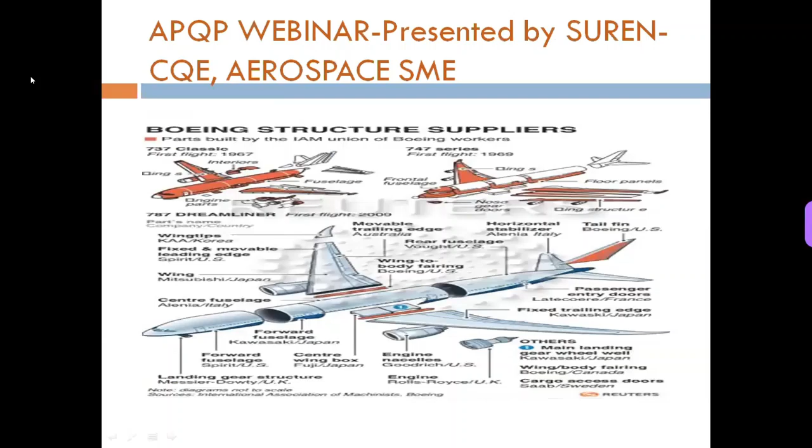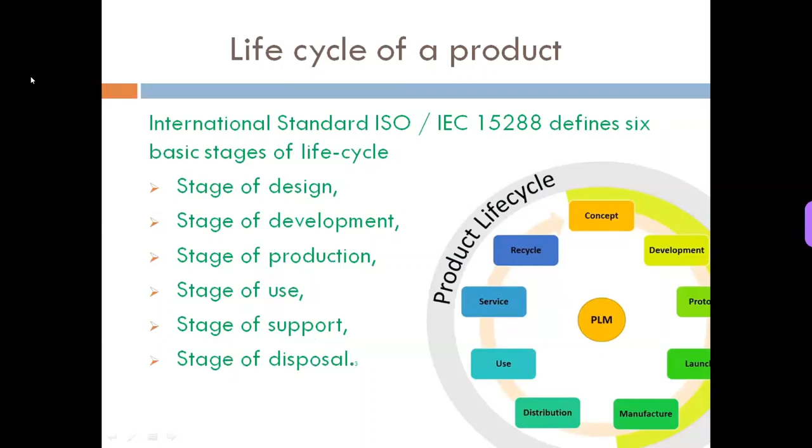So the product life cycle is in 6 phases, from concept development to the product decommissioning.

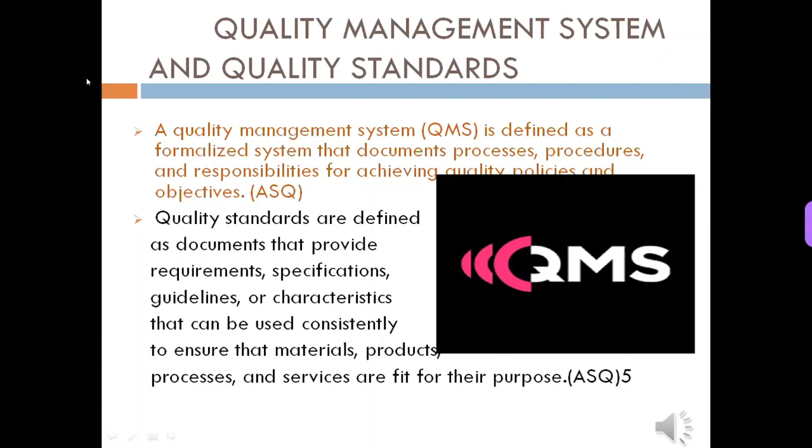So the quality management system that we adopt for aerospace is QMS AS 9100, and the quality standard for APQP is AS 9145. So we'll quickly understand this AS 9145.

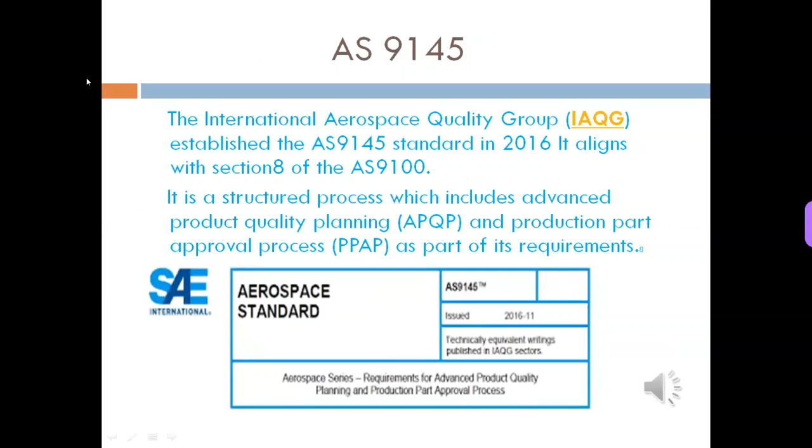It is for the new product development, created by IAQG. And there are similar standards, are you able to see, sir, the AS 9102 and 9103, etc.? Yeah, we can see, please go ahead. So these are some of the other standards that are working in tandem, working in collaboration with the AS 9145.

And we'll take a synopsis of what we have discussed now. The QMS exists in all sectors, and we have just discussed the product life cycle. The quality standards cover certain areas depending on where your company's activity is. The standard AS 9145 focuses on the NPD of aerospace parts. Standard AS 9145 is included in section 8 of the QMS. The QMS is the larger canvas, and if you look at section 8 of the QMS, you can see the AS 9145 there.

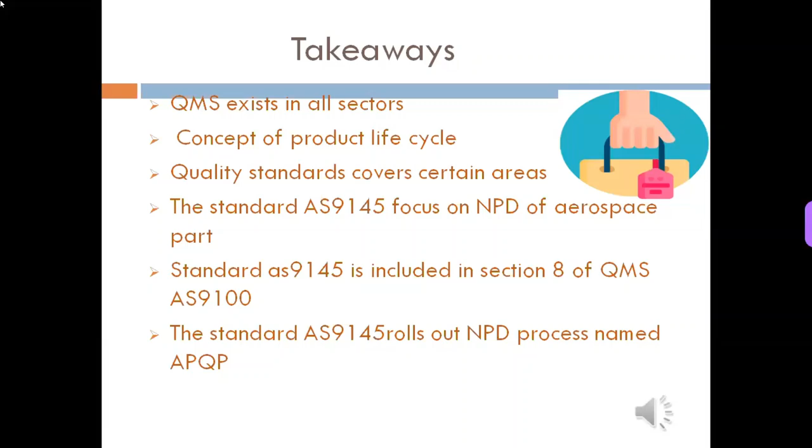Standard AS 9145 rolls out the NPD process named APQP. Now let's go to APQP, what it means, and what is PPAP. APQP and PPAP are two core tools that cover most of the product life cycle of an aerospace or automobile part. This is the reason why elaborate training is given to the personnel involved in new product development. APQP outlines the complete process to the supplier to make sure that the supplier is capable of designing a product and manufacturing it to meet the customer requirements.

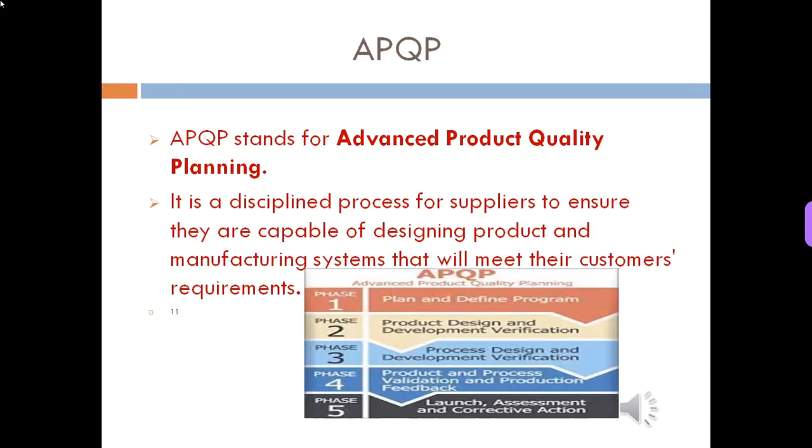PPAP is documentary evidence that demonstrates that the supplier has the potential to produce parts that consistently meet all requirements at the customer demand rate. What's the customer demand rate?

A product has to be supplied at a certain quantity at a certain time. So it's not enough that you produce a part, but the customer would need the part to be supplied at the customer demand rate.

In fact, it is called a blisk. A blisk is a bladed disc. It's an innovation in the design of a compressor. Previously, all the blades were assembled around a disc, and now it is made in a single monolithic design, and it's working very well in the modern aircrafts.

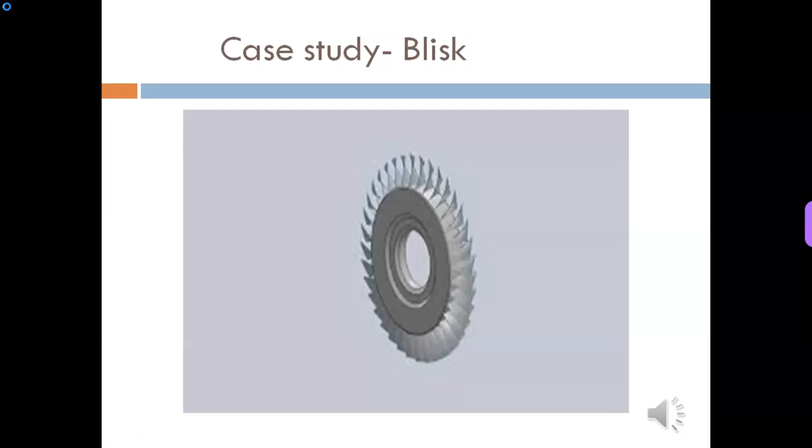So this case study I have just shown you, we will be virtually processing this part throughout this session. So it'll help to understand the process better.

So we are in the 5 phases of the APQP. Is it visible, the 5 phases, sir? Yeah, visible, sir, please go ahead. Yeah, just to make sure.

So APQP is in 5 phases: the planning phase, product design and development, process design and development, product and process validation, and ongoing production.

In the planning phase, one needs to identify all the project scope, and it's just that not enough to make the plan vaguely, but we need to figure out a robust planning. We need to understand each and every element and make sure that this has a written criteria which will be revisited after finishing the project.

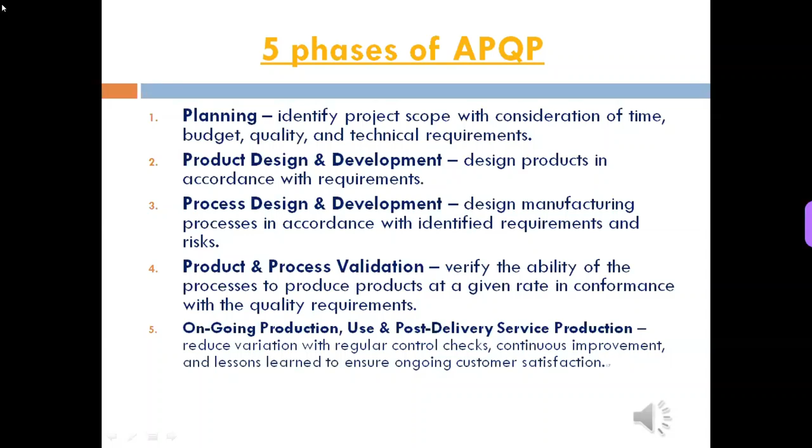In detail, what are the activities? We will be discussing each phase in each slide so that you can understand it later. Right now, we will give only an outline.

I would advise those who are learning this, please try to put it in a paper, save it, and see how time can be saved, how you can concurrently engineer 2 phases together.

So we have discussed the larger canvas, that is APQP, and we also know that PPAP is documentary evidence. So what are those elements of PPAP? What are the PPAP elements?

PPAP will be discussed separately because it's a little bit in-depth and complicated. So we'll just outline them now and we'll move ahead and come back to this at the appropriate time.

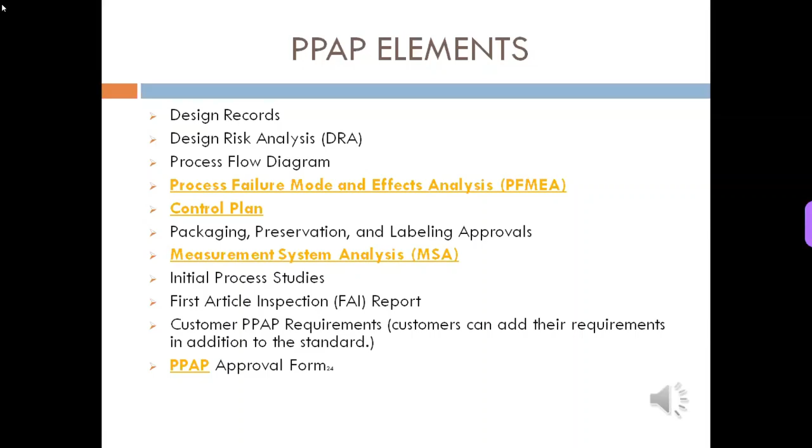It doesn't mean that it should not be recorded. It will be recorded for your own reference, but the customer will ask for the PPAP document from phase 2 onwards. And you can see that in phase 5, before phase 5, the PPAP approval form is completed. What does that mean? It means the customer is not going to allow you to do any ongoing production before PPAP is approved.

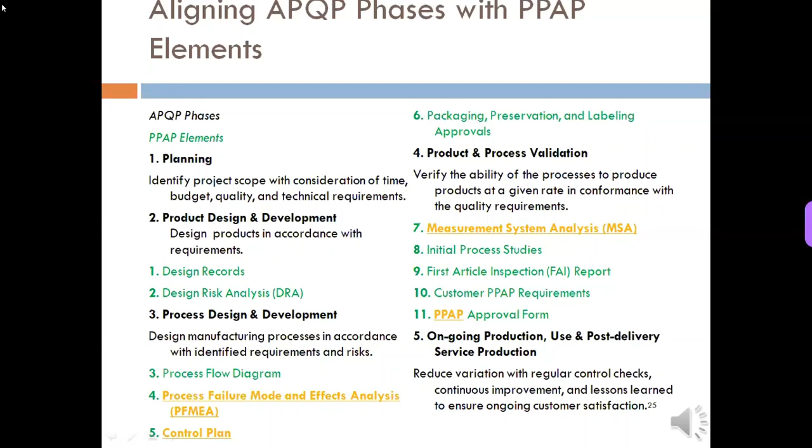So it is not always that the PPAP is approved. PPAP may be partially approved or even rejected. In such a case, you need to go back and make sure that all the anomalies are completed to the customer satisfaction.

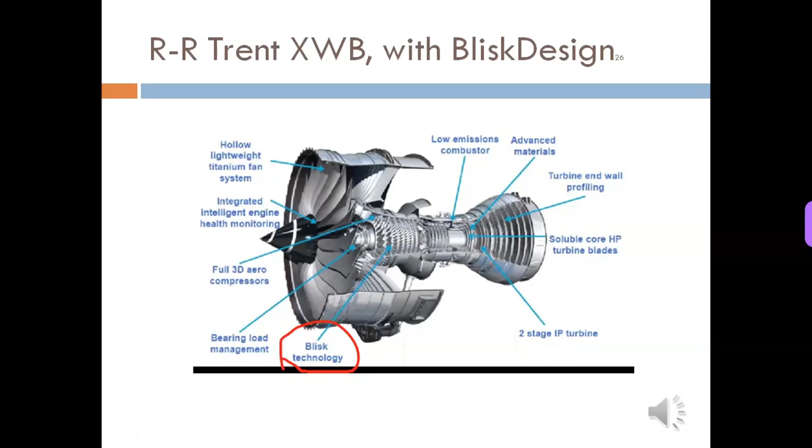So we have seen this case study part and we know where it is sitting. Let's take it out from the engine and have a closer look.

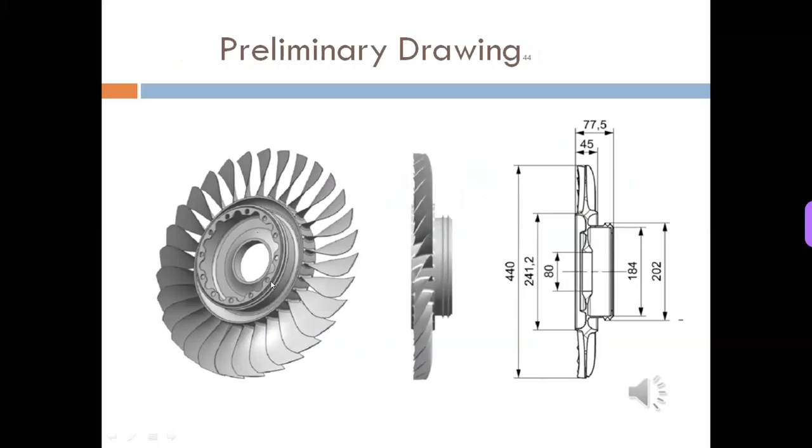These are bolt holes. What is this for? To fit one blisk to another one. And what is going inside this bolt? Some mid shaft and seals here. You have a very preliminary drawing which is required for the processing in the planning stage.

So we are going to phase one, the planning phase. For any phase, any cross-functional team needs some inputs. What are those inputs? You need the product and process benchmarks. You need product and process assumptions. You need reliability studies, the quantified number of the reliability.

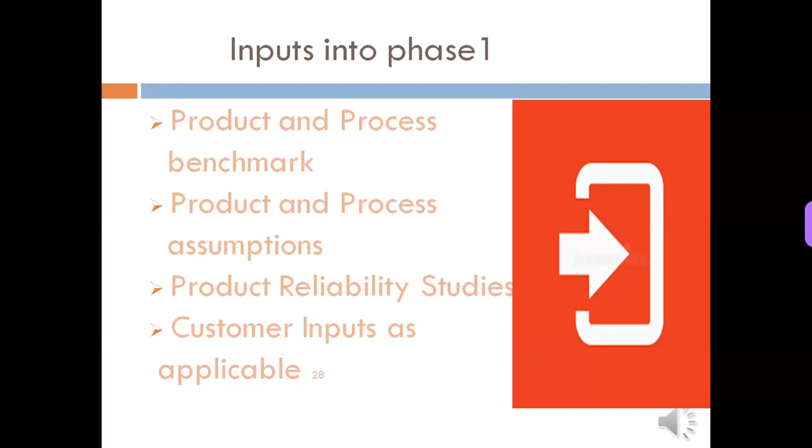And of course, it goes without saying that the reliability of the product has to be better when the next level, next product is initiated. And also, the customer will have some inputs to share, because the customer is in the business for some time and would have learned lessons and will have some input to share. So with all this data in hand, we are moving to phase one, that is planning.

What are the activities in the planning? Basically, collect all the technical and non-technical requirements. Technical requirements are requirements like dimensional limits, specifications, GD&T standards, surface treatments, material specifications, NDT requirements, and any special requirements from the customer. Customer can give any special requirements like surface finish, etc., or uniformity in corner breaks. Customer can add up some requirements.

The non-technical requirements are basically commercial, like who would be responsible for transporting the part to the customer sites? What are the demand rates? And the penalties if a sufficient number of parts are not delivered in time, and the timelines, etc.

Developing a statement of work is required. That's a communication tool that will go a long way in understanding the project very well by both the stakeholders. A product breakdown structure, which is a high-level bill of material, is also required to be understood by the planning stage.

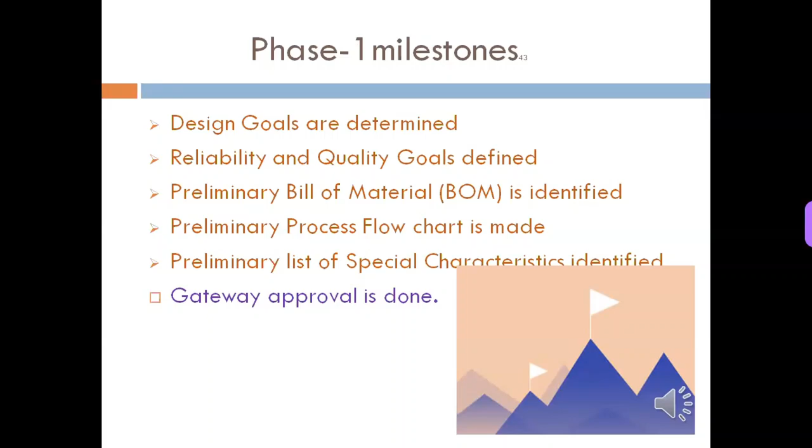And once these criteria are understood, it's called a gateway approval. It's a gating process. It is gated to the next phase. Means this is frozen. Some people call it freezed, and some call it frozen. It's just language, but it is frozen for the time unless some revision comes. So phase 1 is completed. This takes us to phase 2 of the APQP. What are the activities in phase 2? We start with making a drawing. This is called the design record.

And you should not leave any details in making a drawing. Detail in the sense, dimensional specifications and whatever is pertaining to the product should be a complete definition. And now you need to do a risk analysis.

You have a product in your hand and you need to know how the product is going to perform, but the product is not yet made. But how do you make the analysis? There is a tool called DFMEA, Design Risk Analysis: Design Failure Mode and Effect Analysis. Using this analysis tool, you can identify each and every possible failure mode, and then what do you do? You see there are so many failure modes. How do you mitigate it when the product is not even made?

So this is done by the DFMEA team, and they know how to. So we are going to learn this in a workshop session, a DFMEA, how you get the risk priority numbers, and how you're going to reduce them by mitigating the risk in the product. This will be learning. And the next phase is design for manufacture and assembly.

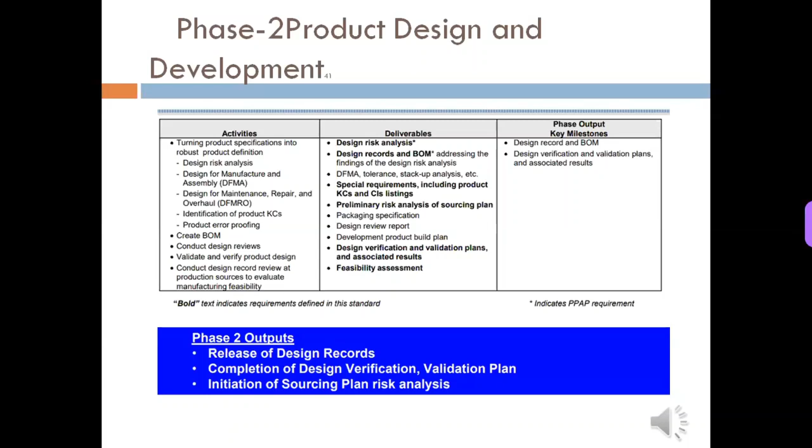I am showing you this slide again, just revisiting, and you can see phase 1 and phase 2 are overlapped, and phase 3, which we are going to look into now, is going to start simultaneously with the product design. So, probably a Gantt chart in a different way will make it very clear what concurrent engineering is possible. It's not extended to the planning stage, start right there.

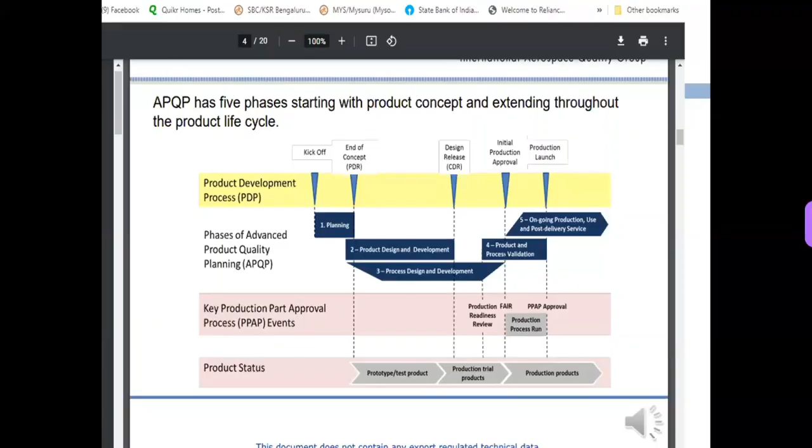It means that phase 3 activities can be, for example, cutting the raw material. Once the preliminary size is given, you can probably start processing, cutting the raw material. For example, I'm saying it doesn't apply everywhere. Please don't take it for granted. But depending on the product, concurrent engineering can be done. So we are moving on to phase 3. What are the activities in phase 3?

Even though we have gated phase 2, we have to identify some areas where phase 3 can be done, and where it doesn't apply, it should not be done. What are the main activities? Activities start with identifying the process and key characteristics. You need to identify, once you start cutting the metal, oh, did I say metal? Are you all in agreement with what I said? Because so many of the components are of composite material now. So I have to change to material.

When you start cutting the material, you will do it in stages, probably a roughing stage, roughing 1, roughing 2, roughing 3, finishing 1, finishing 2, and drilling and deburring, inspection, and special processes like NDT or shot peening, and then the coating, painting, etc.

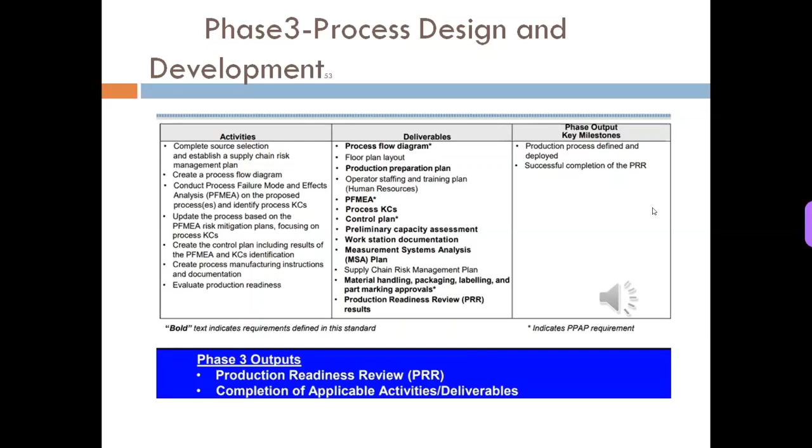There are a few factors: bias, linearity, stability, repeatability, and reproducibility. These are the villains that stand in the way of the inspector who is in pursuit of the truth. The truth is the true value. So we need to go in depth. So why is this required? The customer will need the supplier to conduct the MSA study, without which he's not going to accept the part. So you have to make sure that your measuring system is capable. Covering this in depth will be done in a workshop session. And not only MSA; we will be covering PFMEA, MSA, control plan, all this in a different session.

And what are the milestones? The packaging standards. Packaging is very important because once the part is made so accurately, especially if it's an aluminum part, it's likely to get distorted in transportation. So packaging standards and specifications, process definitions, PRR, which we'll again discuss in detail. A process flow chart is made because now you have identified all the processes, which is a diagrammatic sketch of the process flow. Floor plan is how the machines are laid out. Characteristic matrix is a communication tool. PFMEA, pre-launch control plan, MSA, and preliminary process capability.

What is process capability? For example, you have the size 100.001 mm. 100 was the size required. It's now 100 plus 1 micron. This is the first part. The first 10 parts, average is 100 plus 1 micron. After 2 weeks, take another 10 parts and measure them. Average size has come to 99.997. So what happens? Tolerance is plus or minus 5 micron. You need to give some tolerance. So it's still within tolerance.

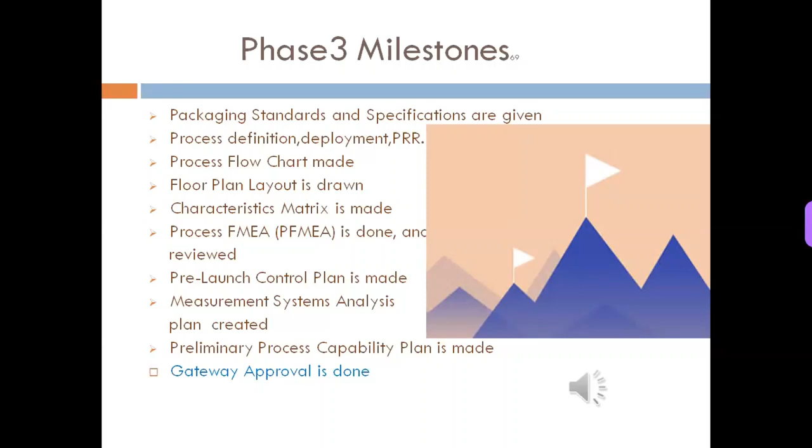This is very important because if the process keeps shifting, like plus 4 microns to minus 4 microns, it covers most of the tolerance field, right? So even though the tolerance is plus or minus 5 microns, the customer does not want you to make plus 4 microns and the next 10 parts minus 4 microns. This is not acceptable. So there is a limit, there is a number, and that number will be calculated and has to be studied. So this is the process capability.

So once all these milestones are achieved from phase 3, we are moving on to phase 4. We have all the process done and we have a first part done, along with a prototype now. Along with the first part, a first article inspection report, FAIR it's called, should be made and submitted in the PPAP file along with the PPAP papers.

And now here you have completed all the production runs and collected the data, and to establish that the part is done, conduct the MSA plan. So the MSA plan is made. How do you do the MSA plan? How do you have control of the capability of the machine or the measuring system?

Probably you will need calibration done up to date. Probably you need to replace the older machines. Probably you need to train the personnel. Probably you need to make sure that the training is ongoing and there is no bias among the machines as well as the personnel. So conduct the MSA study and review all the results of the production runs. Corrective actions, all this you do while doing phase 4.

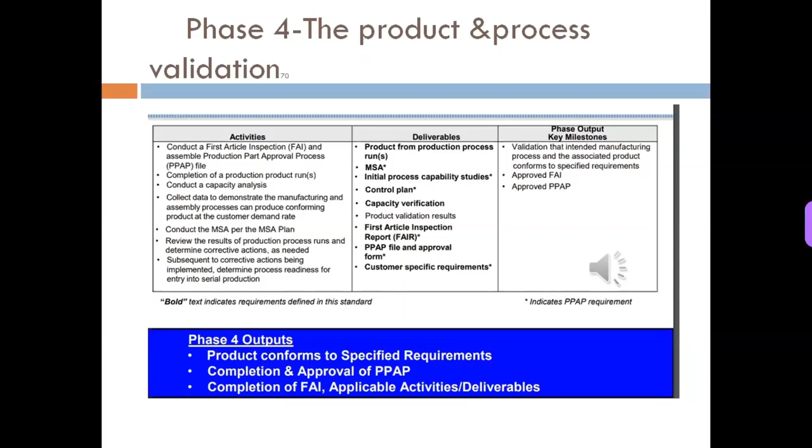So the milestones from phase 4. Now you started producing the part. Production run started. It could be batches. Aircraft parts cannot be like 10,000 parts like automobiles, but the production run is started. MSA results, you now have MSA results. Process capability studies are being conducted in a regular way, right? It's just a study, just measure and make sure it's happening. If the process is not capable, they are not going to reject anything, but they will give you a warning. PPAP process is now completed.

Production validation is done. You need to validate. What is production validation? It's not product validation, it's production validation. It means you validate that whatever is planned is being done properly. That is production validation. Packaging evaluation is done, and it should be recorded. It's a PPAP requirement. The production control plan is a live document.

Again, what's the control plan? The control plan is how you control those critical dimensions in the machining stage, or whatever the operation stage is. What are the plans? It's not a failure mode analysis, but whatever critical items are in the failure mode are taken forward to the control plan.

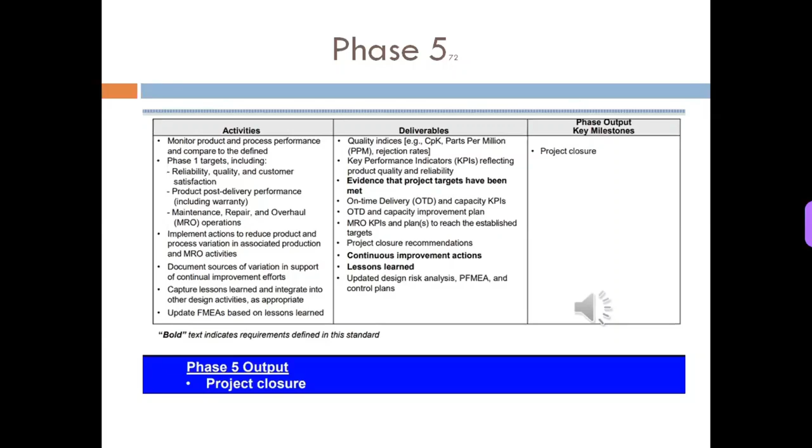And you also need to revisit phase 1 here, to make sure that all the criteria in the planning phase, whatever is planned, are met. And now CPK, parts per million, KPIs, on-time delivery, all are done. This is not easy. It's easy to make 10 or 15 parts first, because you're putting all your effort into the first part. But can you continue the same effort for the demand rate? So this is why phase 5, and why we are revisiting phase 1 again, to make sure that the goals are achieved.

So no quality study goes without visiting this PDCA cycle. Plan, do, check, act. We have the planning stage, the development and verification, and we have executed the part. And now we are going to the planning stage again. There is a window of improvement here. This is why this cycle is very important. In any aerospace company, the customer would need a window where you have leapfrogged to the next level of continuous improvement. Could be 5S, could be some Kaizen. You need to show that you have taken effort to improve. You can't say, yes, we have done all the parts as per requirement, now what? It's a very classic cycle, and this is what is taking us from a normal phone to the latest iPhone.

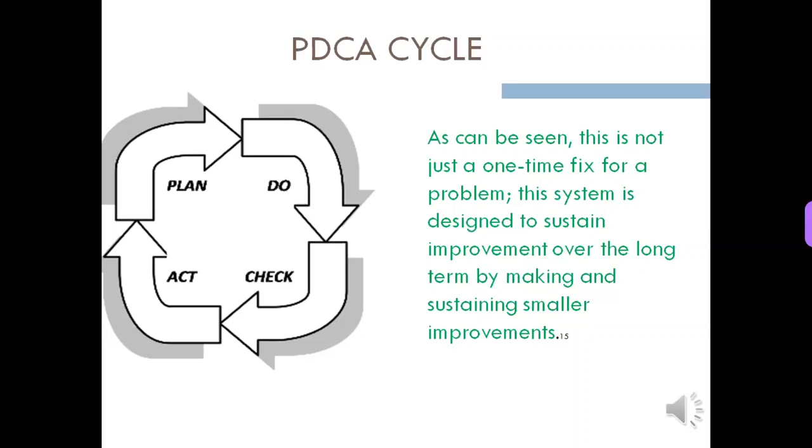So phase 5 milestones. We have reduced the variation now because of all the efforts. Remember the capability study. Now the process is more stable. Improved customer satisfaction: customers understood that you have reduced the variation. Improved delivery performance, very important. In fact, it's one of the reasons for the revision of the QMS, that delivery was not happening. They become lethargic after the first part is approved. And effective use of lessons learned: the lessons learned in corrective action are recorded, revisited, and applied to the next part.